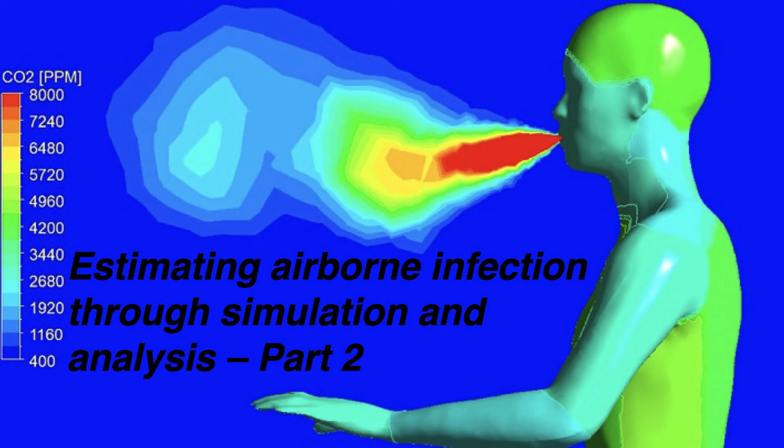As we all know, the built environment has been significantly influenced by the pandemic, and ventilation in buildings is one of the crucial measures for mitigating the spread of COVID-19 and hence a huge part of the international management strategy. So today we have a range of speakers who have been working in this important topic and have contributed to our understanding of how COVID has impacted our spaces, including influencing some of the recommendations and policies on mitigating its spread and making our buildings safer.

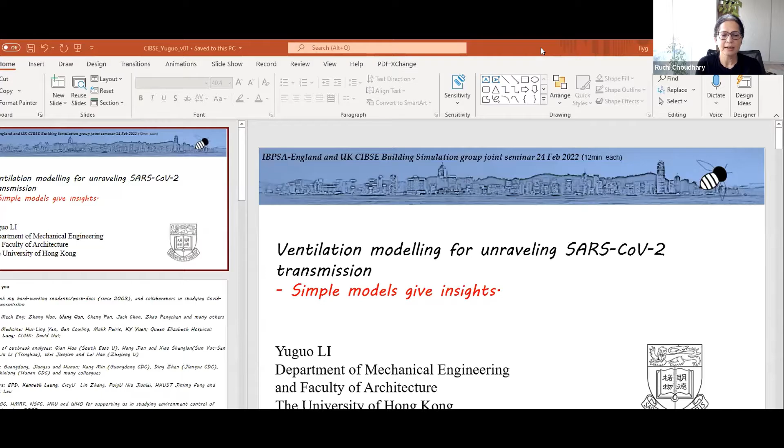So we have 4 speakers spanning industry and academia. Our first speaker today is Professor Yuguo Li, who is a chair professor of built environment at Hong Kong University. His research includes city climate, environmental studies of infection, and indoor environment. He also serves as editor-in-chief of Indoor Air, and he has collaborated with WHO, CDC, Hunan CDC, and Hong Kong EPD, and studied the transmission routes of SARS-CoV-2 in buildings.

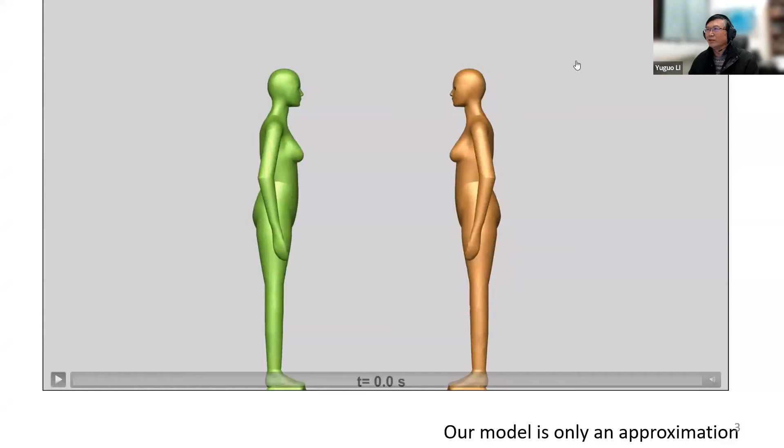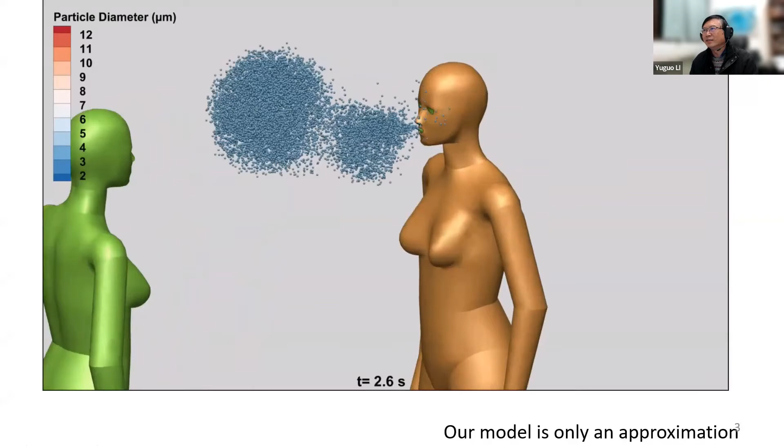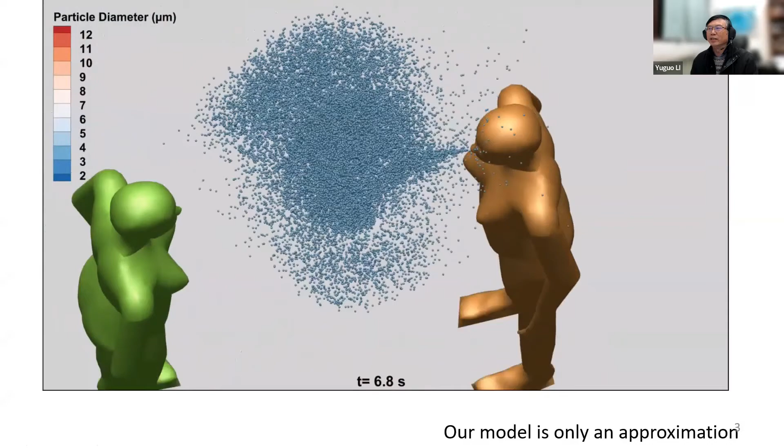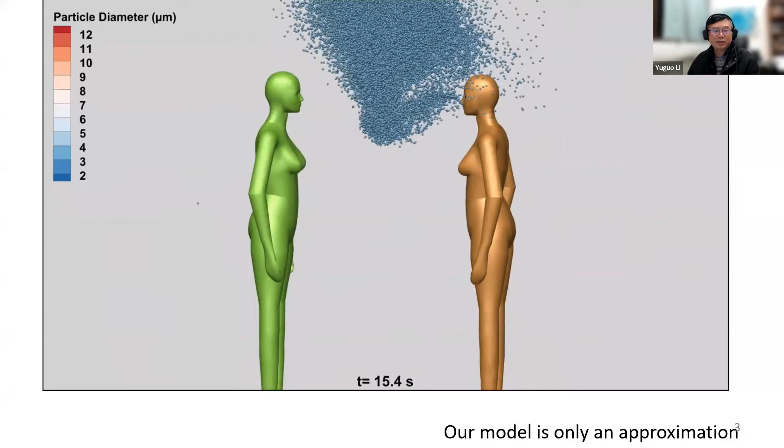Professor Malcolm Cook mentioned the colorful things, and I also like to start with the interaction between people when you move your head and produce droplets. Our assumption is the transmission is coming from the expired droplets, and although this kind of computational fluid dynamics can offer a lot of insights, simple models I find to be maybe most insightful. The model is an approximation, and this should be known to you all.

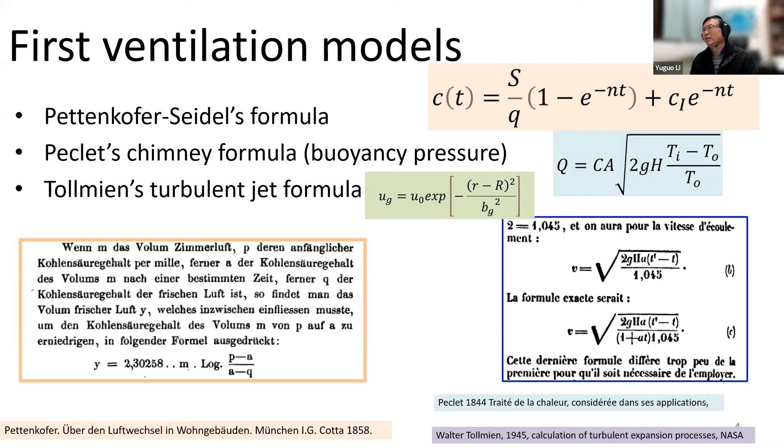There are 3 very basic models, and you might consider them the first ventilation models in the history of our understanding. The mixing box, with concentration as a function of ventilation rate and air change per hour, should be called the Pettenkofer-Seidel formula; in Germany and Japan it's called the Seidel formula. I learned the chimney effect came from Péclet; computational fluid dynamics people know this Péclet number. And the turbulent jet formula, probably the first one is Tollmien, Walter Tollmien, 1945. Those are the 3 formulas I will use today.

Maybe start with Hong Kong, because the situation there is challenging: we are crowded and the rooms are small for most families. So if you have exposure of half an hour, or 8 hours a day at work, which one is better? You stay in a large room with less ventilation, or in a small room with good ventilation?

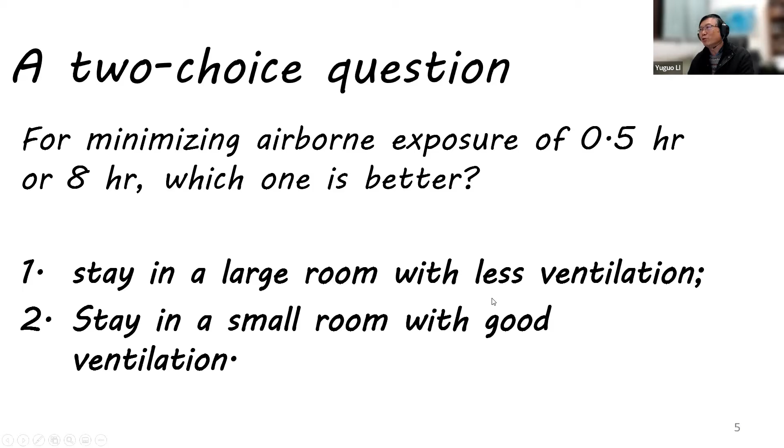In the past, we have been discussing whether we should use ventilation rate or air change per hour, until I had this simple model. You basically integrate the mixed room solution into the Wells-Riley equation for infection risk estimate. Then you take the integral for a duration of time, and the risk becomes something like this, and add a little extra part, which was already done by somebody in the 1990s. Let's call it the per unit ventilation rate correction factor. You can plot that factor for a wide range of ventilation rates, and the horizontal axis gives you volume per occupant.

Then you find a very strange thing: there is this black dashed line across the system for a wide range of volumes. If N and delta T are sufficiently small, but not very, very small, you do a quadratic approximation, then you find this one plus CT over QP equal to delta T over VP, the volume. Eventually you find this whole thing, infection risk or exposure, has nothing to do with ventilation rate or air change per hour. It actually is the volume.

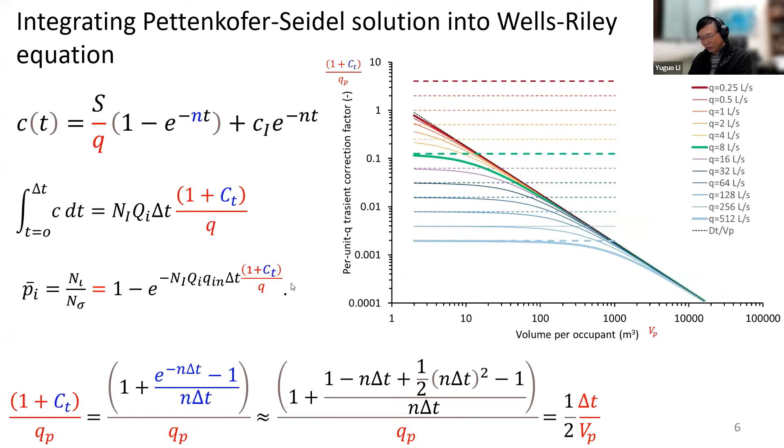So it's very interesting to use this very simple model to tell us quite a bit of physics. And the lower the better on this diagram. Of course, the smaller this red correction factor, the lower the risk. So this is the first thing you will learn.

And then for the JET model, before the pandemic, just in year 2019, we submitted this paper. A student looked into this jet, the particle deposition in the jet and inhalation. And she found out, mechanistically, the short range airborne can be 10 times, now using CFD, probably 2 or 3 times more important than the droplet transmission.

So this is very important, and such a little understanding shows how important the short range inhalation is, and that really helps to define short range airborne transmission as one of the major routes for the pandemic, for SARS-CoV-2, and probably for others too.

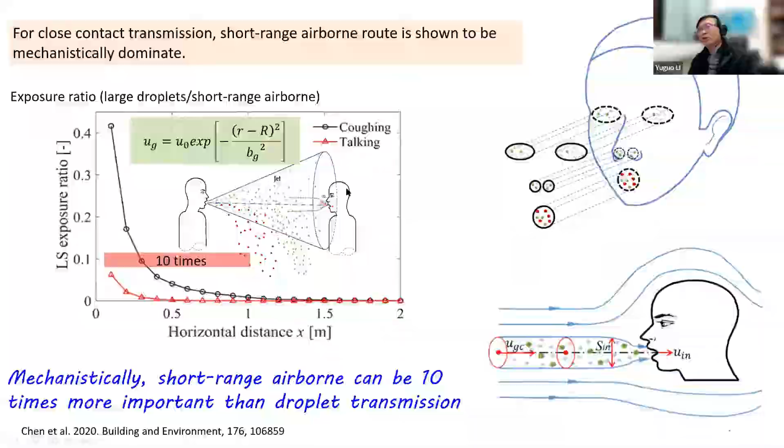And during the time, we learned that less outdoor infection is actually very important. I was asked in a seminar like this by a colleague at UC Davis, how do you explain that most infection occurs indoors, but less outdoors? Probably for Omicron, we can have outdoors. We can discuss if you like.

With some assumptions, you find if this is outside at a distance of 75 centimeters, then the concentration in the jet average is just 8.3% of that at the mouth. So in a room, if you give good ventilation, 10 liters per second per person, you get 8.8%. But if you have 1 liter per second, then the whole thing increases by 50%. Very significant. So it's the first time I quantified the ventilation impacts on short range transmission.

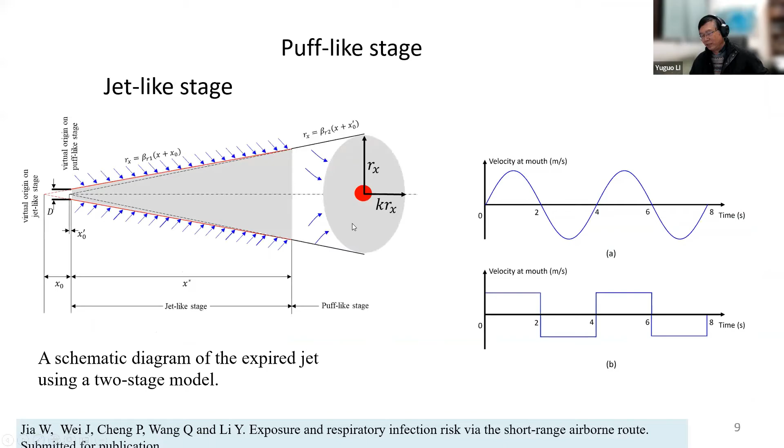Of course, the real expired jet is not steady, and then you may have a puff. And you can also develop a much better model. This model is now being reviewed, and dilution is very, very significant. This dashed line here is just following the linear, but actually it's non-linear as you move away with different activities, and dilution in the real calculation is much greater. We compared with some experimental data, and we find this dilution is much more meaningful.

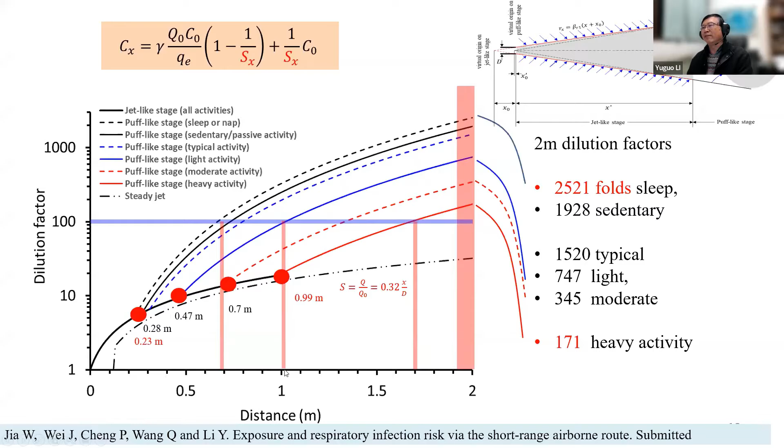If you have 100-fold dilution, that's very similar to 10 liters per second per person. When you exhale 0.1 liter per second per person, 10 divided by 0.1 equals 100. So after 100-fold dilution, distance is no longer relevant. And so that's why different countries have either 1 meter or 2 meter social distancing.

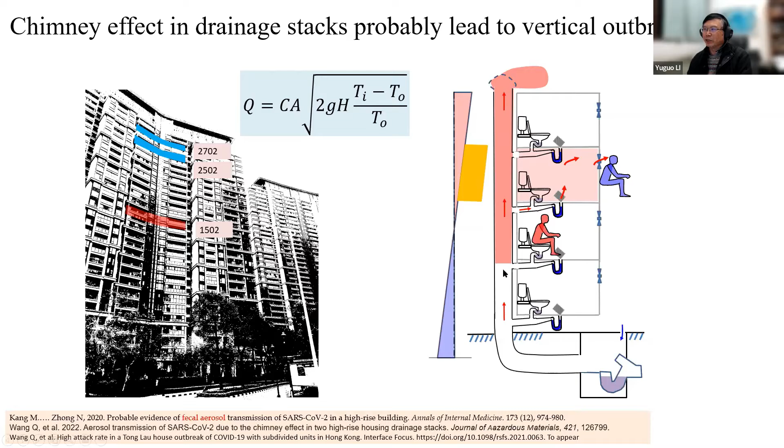And because of time, I will go through this quickly. The chimney effect: interestingly, we had many outbreaks with distant flats, and they were infected. We had probably around 15 before Omicron. Now with Omicron, there are too many every day to even be investigated. So this shows very strong evidence for airborne transmission. We have been measuring ventilation rate in the drainage stack in high-rise buildings, and we now highly suspect the chimney effect plays a role.

So anyway, 3 simple models actually allow us to develop a hypothesis that short-range airborne transmission and long-range play the major role, and the exact ratio between the 2 remains to be known, probably different for different situations. Anyway, they can explain almost all major phenomena we observed in the transmission. So I really go for simple models that reveal insights.

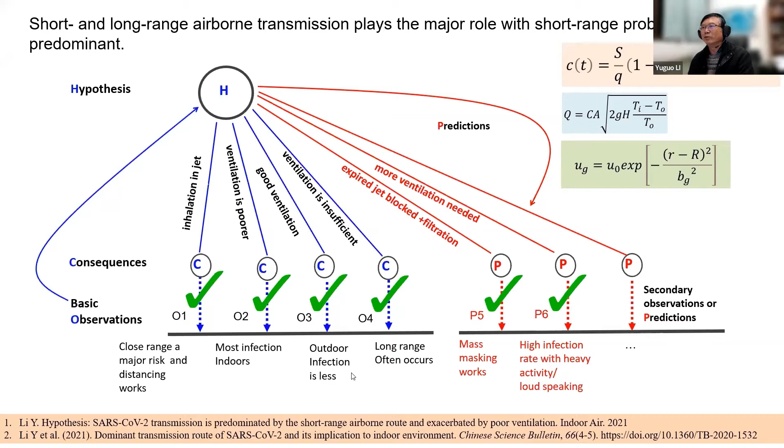So this will finish my quick talk. The simplest models, I believe, tell the real story, and poor ventilation worsens short-range inhalation risk. I believe future modeling will be more integrated with human behavior and virus kinetics.

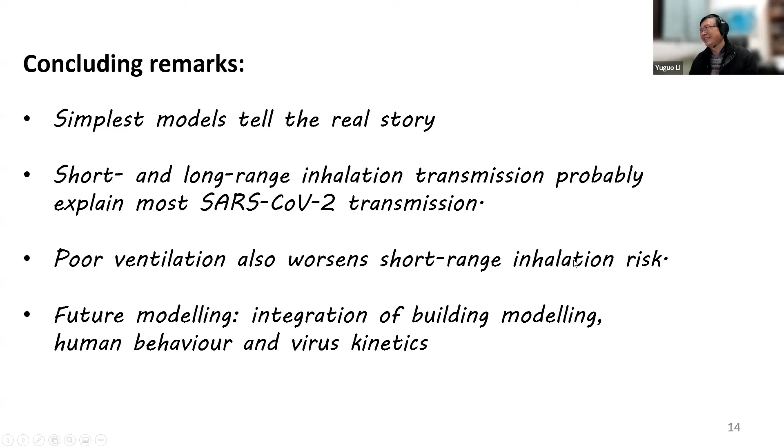Also, I suggest that we keep the questions to the end and move on to our next speaker, Professor Malcolm Cook, who is a Professor of Building Performance Analysis at Loughborough University and PI of IBPSA project AIRBODS, which many of you have heard about in the previous session as well. He, in addition to completing several of the UKRI and EU-funded projects, has also consulted for a wide range of applications worldwide, which included both the design and simulation work for healthcare buildings, schools, theatres, and libraries. So, Malcolm, over to you.

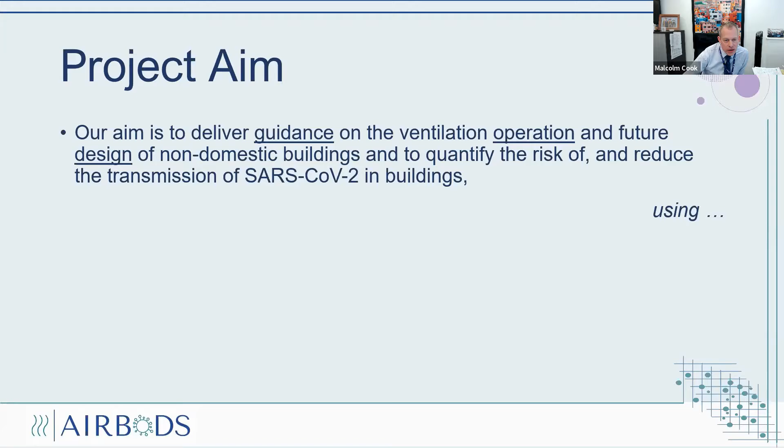And these are our methods. So we're really working across all of the three key research methods. We've got experimental work, computer simulation, and field work to give us the design guidance, which we're bringing together over the next 6 months or so. So I should say we're just over halfway through this project.

So first of all, experimental work then. So my colleagues at UCL are undertaking work in this Class 2 environmentally controlled chamber to provide experimental data on the transport and distribution of aerosols. So this gives us a greater understanding of the transport of exhaled aerosols, and provides us with a validation data set for our computer models. And you can see the specification of the chamber there.

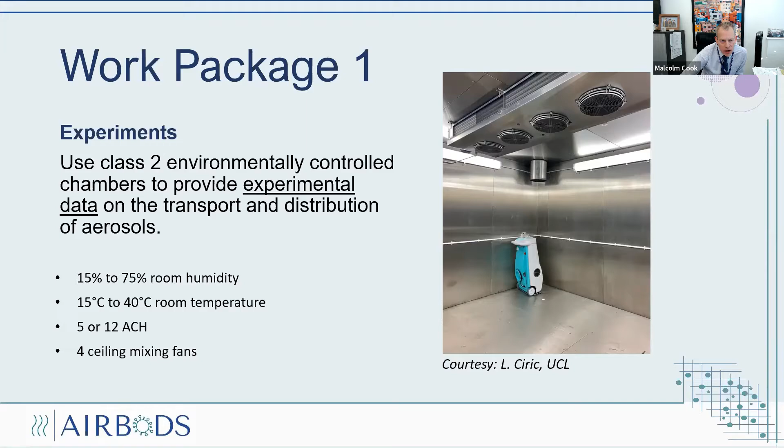So here are some of the examples of the tests that we've run to date. So we're looking at different types of aerosol generator. So PBS there, the phosphate buffered saline, as well as synthetic saliva, over a range of temperature, relative humidity, and ventilation conditions. The shaded boxes there simply indicate the cases that we've looked at so far.

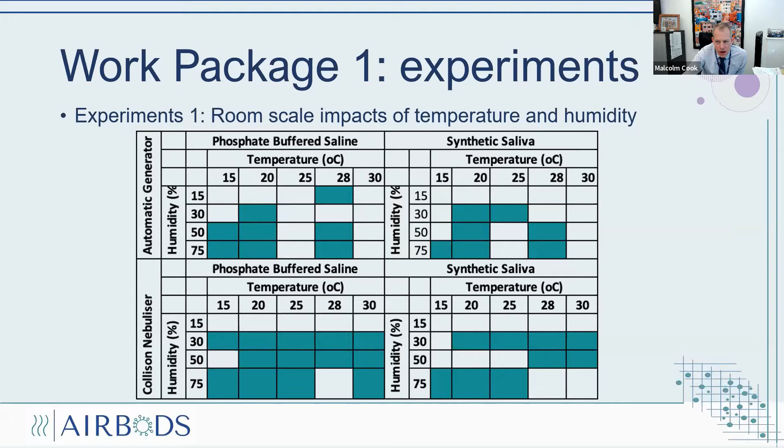And then here are some initial results. So time along the horizontal axis with the number of particles detected on the vertical axis. That's the number of particles at 0.5 meters away from the source, or at the chamber outlet here on the right hand side. So this shows the release of aerosols after 10 minutes, and then the variation in the particle count depending on the temperature and the relative humidity. So what we're seeing here is a clear correlation between the moisture content in the air, the relative humidity, and the particle counts.

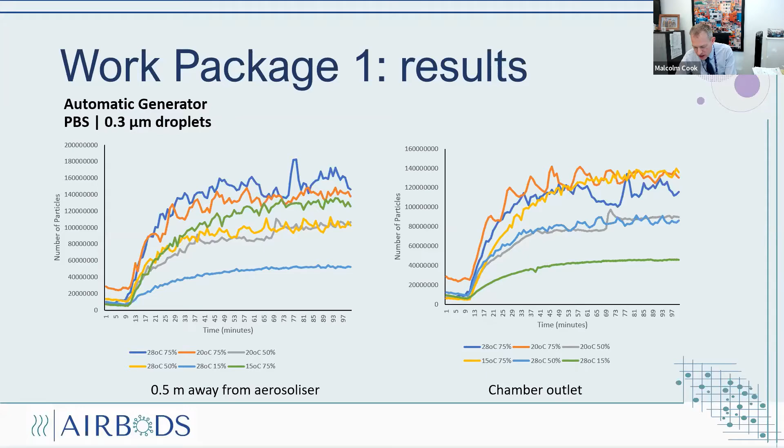So if I take the blue and orange line here, this shows the environmental chamber operating at 75% relative humidity and 28 and 20 degrees C, respectively. And we see that for those higher relative humidities, we're seeing a greater particle count, which is important in terms of understanding what the risks are in terms of transmission via airborne aerosols, depending on the relative humidity of the space. So out in Yuguo's environment in Hong Kong in the summer with high relative humidity, there may be much greater propensity for transmission relative to, say, out in the dry desert of Las Vegas. So that's work that's ongoing in the chamber.

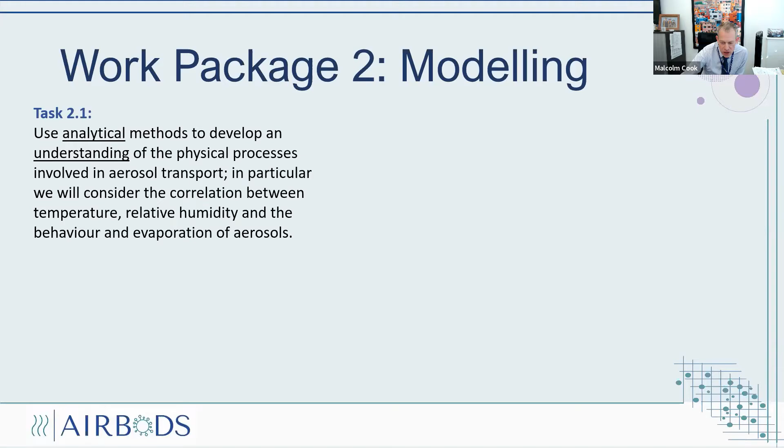Then I want to say a little bit about modelling. So we've got three areas of our modelling. First of all, we're developing analytical methods to develop our understanding of the physical processes. So we're looking at scalar analysis, we're looking at Lagrangian particle tracking, and we're inputting that into the detailed CFD model, which I'll talk about on the next few slides.

But then just echoing something that Yuguo mentioned, we've also got an analytical model where we've developed a relative exposure index model that enables us to determine how safe relative to a benchmark environment a certain space is.

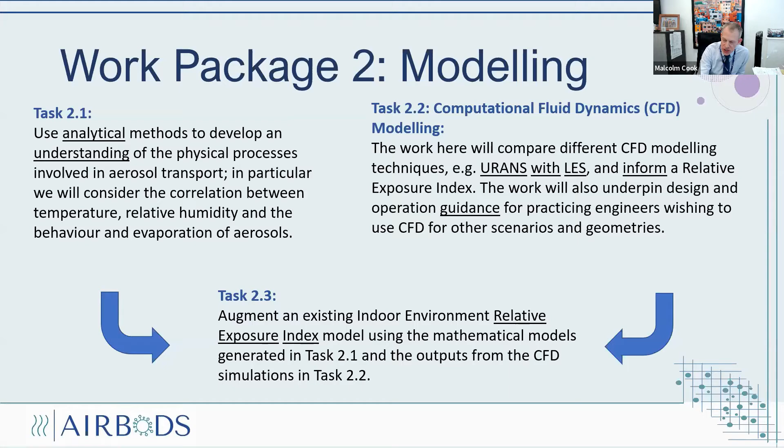And I'll show you some of those results as well in this presentation. So just staying with the CFD then for a while. So what we've got here is a coupled model of airflow and human thermal comfort. So this mannequin in this simulation is a thermoregulated breathing mannequin, so it loses heat to the environment or gains heat, whatever the temperature difference might be. These are transient simulations, buoyancy driven, obviously, and a very low ventilation rate.

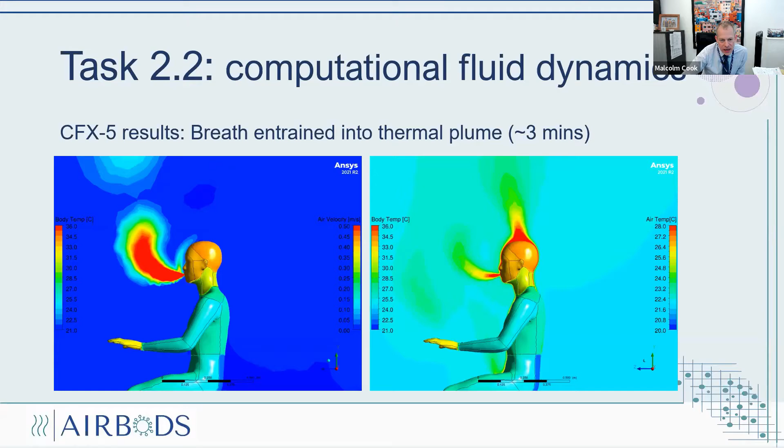So what we're looking at here is how CO2 builds up in the environment. And also what we'll be doing shortly is to add particles into this exhaled breath. So on the left hand side, we've got the airspeed field, and on the right hand side the temperature, so you're able to see the plume above the seated mannequin, and then the temperature of the exhaled breath. But really what we're interested in is this CO2 distribution. In the interest of time, I'll just go straight to the animation.

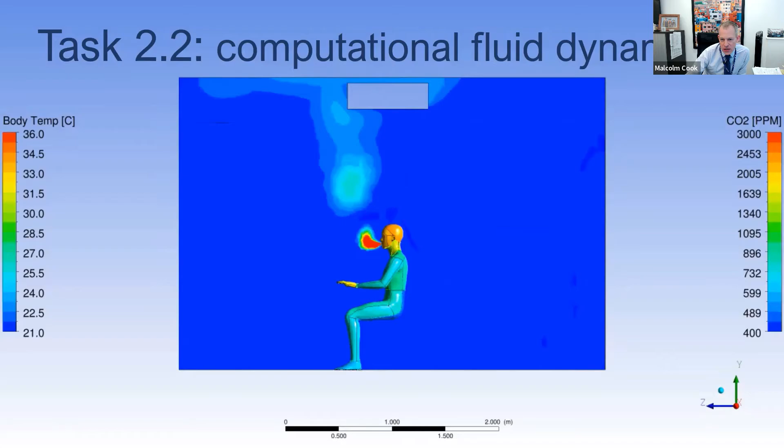So as I say, we've got a breathing thermoregulated mannequin. We're very keen on the accumulation of CO2. We're very keen on where that CO2 builds up, and are keen to look at the correlation between CO2 and particle tracks. So when we put the Lagrangian particle tracking into this model, that will enable us to gain an insight into the use of CO2 for assessing the transmission risk of viruses.

So then if I just move on to task 2.3, so this is the relative risk index model which I referred to, which has been developed by Ben Jones and Chris Iddon at Nottingham University, both of whom are with us this afternoon. So what they've been doing as part of the AIRBODS project is to develop a model based on a balance of the viral gains, the gains of genome copies due to emission from a person, the ventilation system, and the virus already present in the space, and how that might get diluted or removed from the environment. And there's a reference there which talks in much more detail about this model.

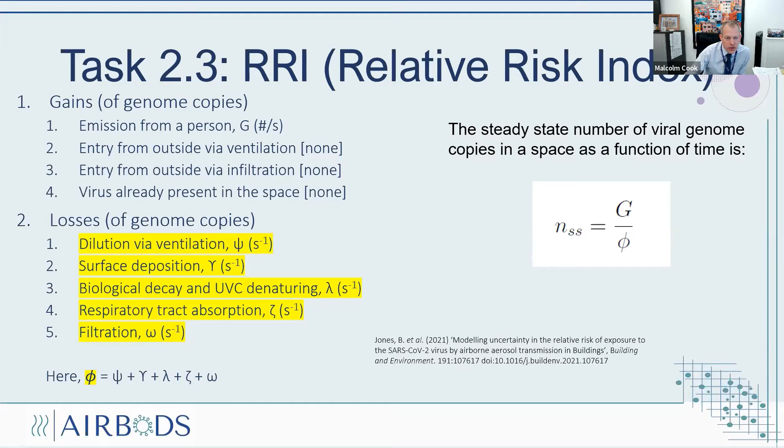But essentially the gains are measured in number of genome copies per second, and then the losses are arranged such that they can represent almost an air change rate. So if we divide the gains by the losses, then we get the number of genome copies, an indication of the viral load inside the space. Excuse me.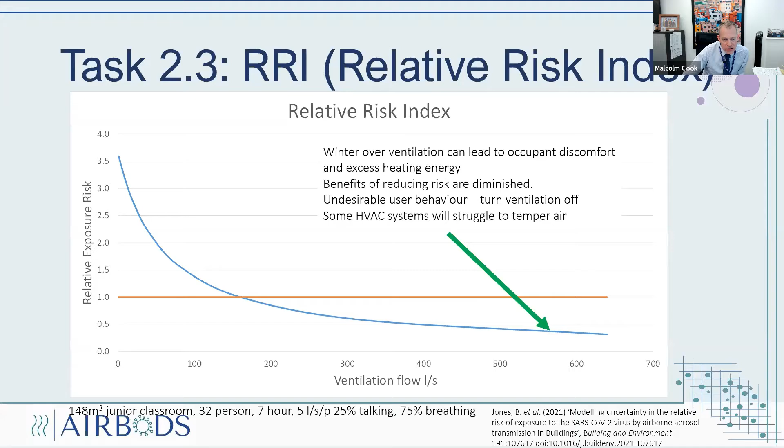And many of you will be familiar with the debate over, well, if I increase the ventilation, I'm going to increase the heating load. There are risks of occupant discomfort. But what this model enables us to do is to really start to quantify the benefits or the disbenefits of increasing ventilation flow rate. So as you can see, it's an exponential relationship. So even though we do reduce the risk of transmission, the rate of that improvement decreases in the manner you can see there, and at a rate that you can see there.

So of course, our attention as modelers and as people wanting to make a difference to the safety and the indoor environmental quality of our occupied spaces, our focus is in here. As you start to reduce the ventilation, or as people choose not to open the windows, how quickly does that relative exposure risk increase? And using this model, we can actually quantify the increase of that risk.

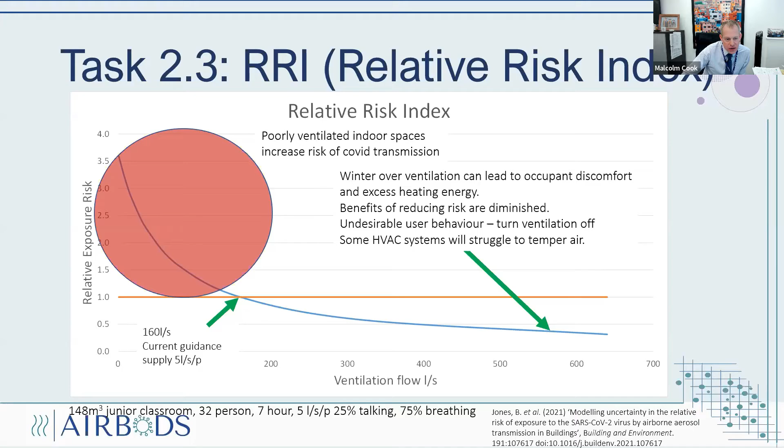Moving on to the field studies, so we were very fortunate. We were tied into the government's events research programme, working, as I said earlier on, with the DCMS and BEIS, involved with Wembley Stadium, involved with the famous nightclub event in Liverpool, plus some corporate conference events, as well as semi-outdoor festivals. So this picture on the bottom left here shows my colleague Ben Roberts at the Download Festival installing sensors, which is actually about 5 miles north of Loughborough, near to East Midlands Airport.

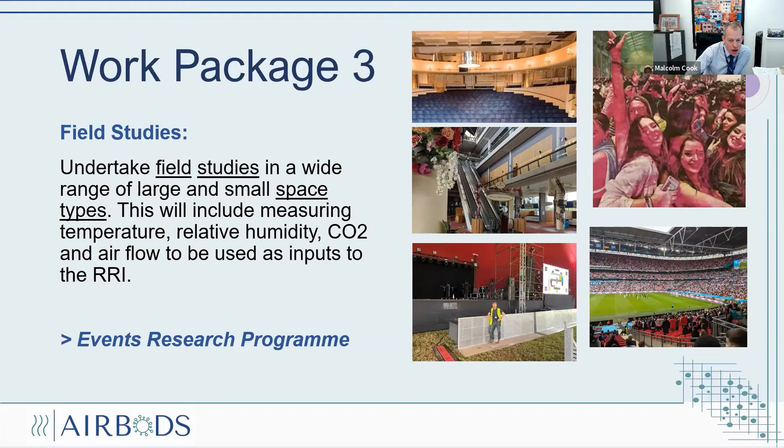So this work was led by Liora Malki-Epstein and a team at UCL. She coordinated this massive task of, and I won't remember the numbers, but hundreds of different spaces and tests across the country. So this was a mammoth undertaking for our team.

So this is about assuming that CO2 gives us a good indication of ventilation performance. Now we know that CO2 may not be directly equivalent to SARS-CoV-2, but we do know that CO2 is exhaled along with water vapor, and that these viruses live on water particles.

And part of what we do in AirBods will be to draw this comparison between CO2 dispersion and the dispersion of aerosols to really give some insight into the accuracy of using CO2 for assessing this transmission risk. But certainly we were able to use CO2 to give us an indication of the likely ventilation performance of the space.

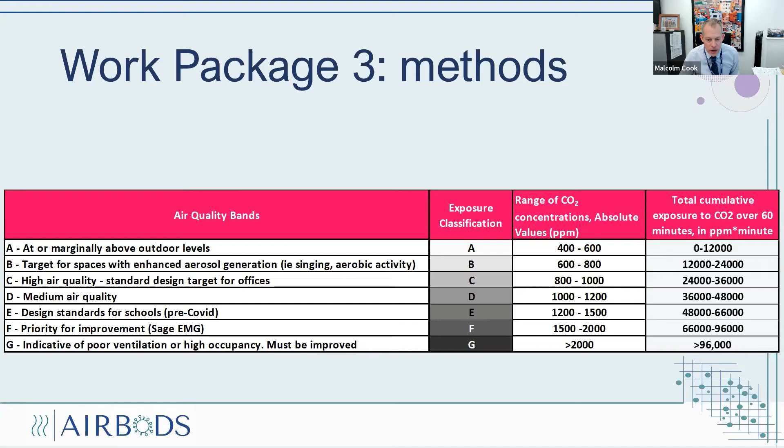And we did that by looking at instantaneous CO2 levels, shown here in the third column, and also multiplying the prevailing CO2 levels with the time that those concentrations existed to give us this total cumulative exposure to CO2, and using that came up with this exposure classification from A to G. And you can read much more about this in the documents, and I'll leave you with those references at the end. But just running through some images then.

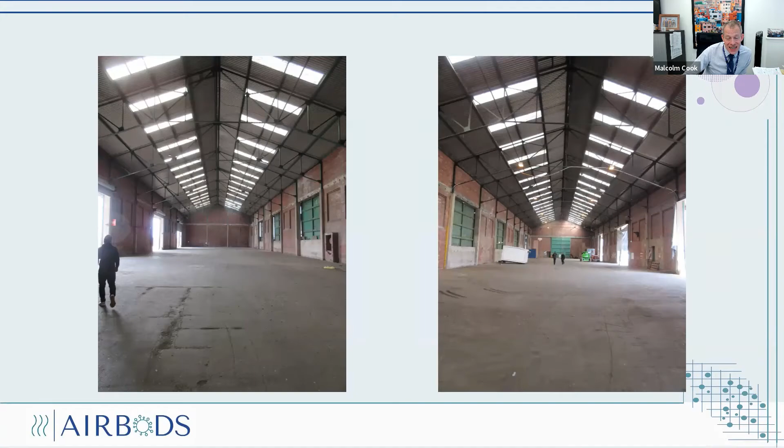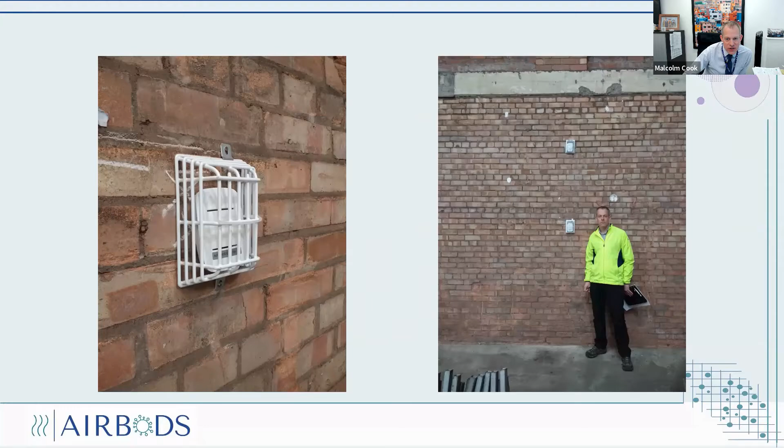So I mentioned the nightclub in Liverpool. This was a very, very large space, so 160 meters plus in length, and naturally ventilated, essentially from one side. This shows the sensors that we used. We were very nervous about this installation, thought that very few of them would come back, but I have to say my confidence in the people of Liverpool has been fantastic in terms of this. We got all of the sensors back. It was great.

So some of you may have seen that on the front page of the newspapers when we were undertaking this work. Just as a context, so here are our sensors along the edges of the space. With more time, we could have done a more detailed risk assessment, and we could have had cherry pickers in there. But what you've got to remember is that Liora and the team were setting this up in a matter of hours and days to make this happen. So we did what we could and did a good job, of course.

Yeah, have I got to finish now? Yeah, okay, thank you.

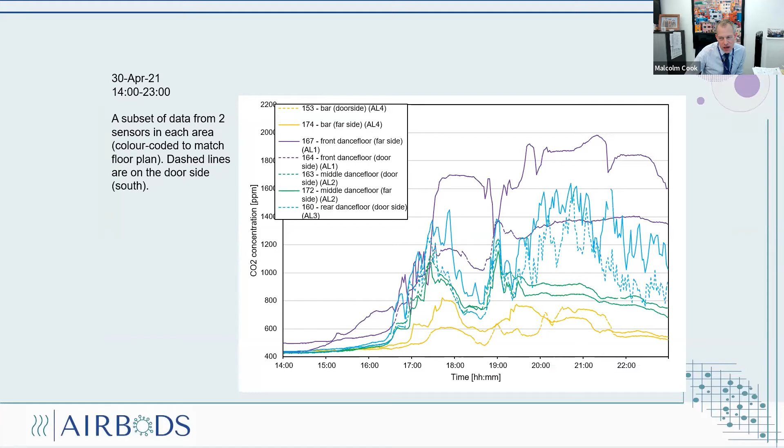So in terms of the CO2 levels, it won't be surprising for you to hear that the CO2 levels were higher on this side of the space than they were on the side where the openings were. So the single-sided ventilation meant that we were having a problem with crowding over on this side in terms of the CO2 levels, and they're shown in the graphic here. So I'm going to have to finish up here.

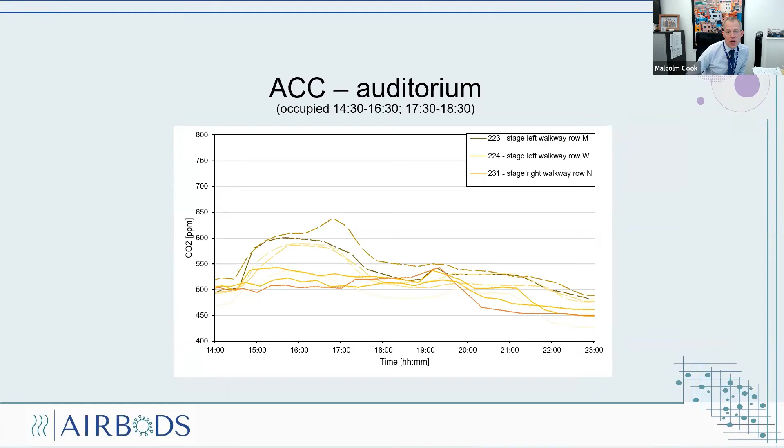This was a much more formal environment, lower occupancy, and unsurprisingly, CO2 levels much lower, and a space where we understood the ventilation much better. And that's what we found. So it was surprising the number of building owners we were working with who didn't understand how their buildings were intended to be ventilated. Understanding the plant, understanding when it was last renewed, commissioned, etc., is one of the incidental outcomes of the project.

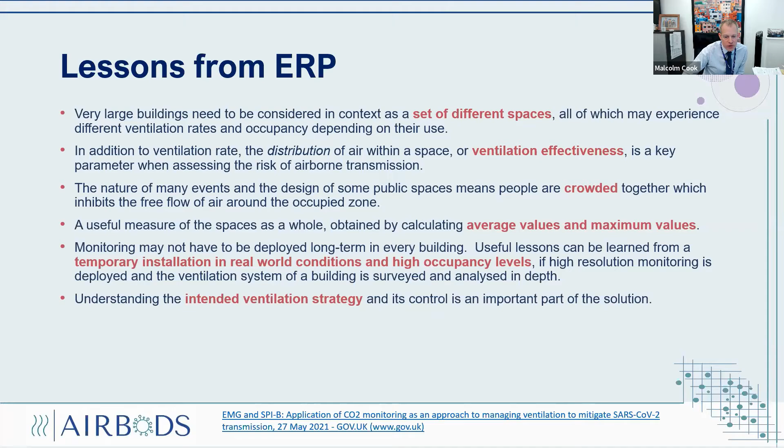So I'll just finish here. What we're doing now is to gather all of this information together, do a bit more CFD modeling, and develop our design guidance and dissemination. Do please visit the AirBods webpage, where we've got a list of publications showing a lot of the data that I've just been presenting to you.

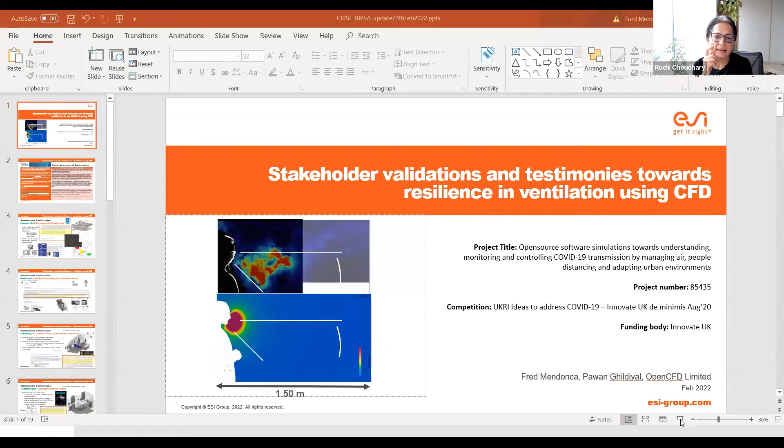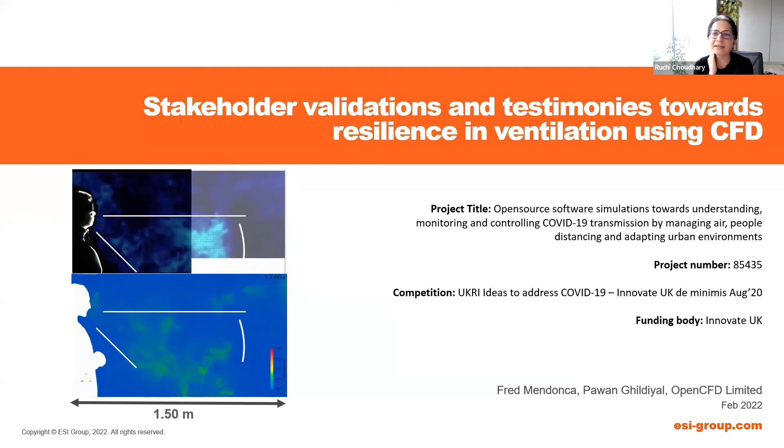And thanks a lot, Ruchi. Can you just give me a sign that you can hear me and see my screen? Yes, we can hear you and we can see your screen. We don't see you, but yeah.

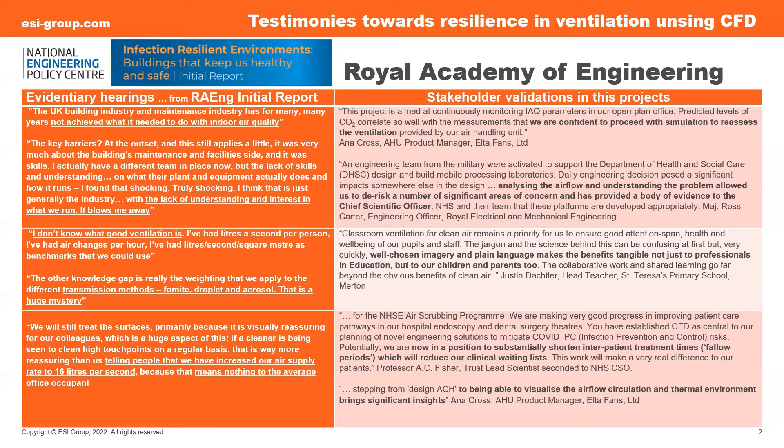Another testimony is coming from the healthcare sector, who are now feeling that they're in a position substantially to shorten their inter-patient treatment times, so-called fallow times, which reduces clinical waiting lists. Being able to visualize airflow, circulation, and thermal environments brings significant insights. So we feel as engineers a little bit like the cavalry coming over the hill, the knights in shining armor, showing how to use engineering really practically for the everyday environments that we find ourselves in. So I'd like to give you some examples here of some of the stakeholder studies.

The first one is really to do with validation. So we're sitting in a fully occupied and equipped office environment. The office here is actually the head office of Elta UK fans. Its occupancy is about 25 people dotted around the main office that you can see on the top right there, and the schematic on the bottom right. And essentially what we're doing is taking full detail of geometries, equipment, computer equipment, heat sources, heat losses to the exterior, ventilation, etc., including breathing cycles, breathing with or without a mask, talking loudly, all sorts of variants there, and trying to compare those with real validations in terms of humidity, CO2 and temperature measurements.

So on the right-hand side here, if you can see my cursor, is an actual set of measurements of the CO2 level during the day. On this particular day, which was the middle of July last year, during the morning, obviously the CO2 levels have recovered down to very low levels, or background ambient. And then as people start to enter the office, it climbs up to around 600 ppm. There's a slight dip at lunchtime and then it recovers back up to the same steady level, and then goes back down to background levels once the people have left the office. So you can see from these measurements, we can approximate a steady state in the office at around 600 ppm here.

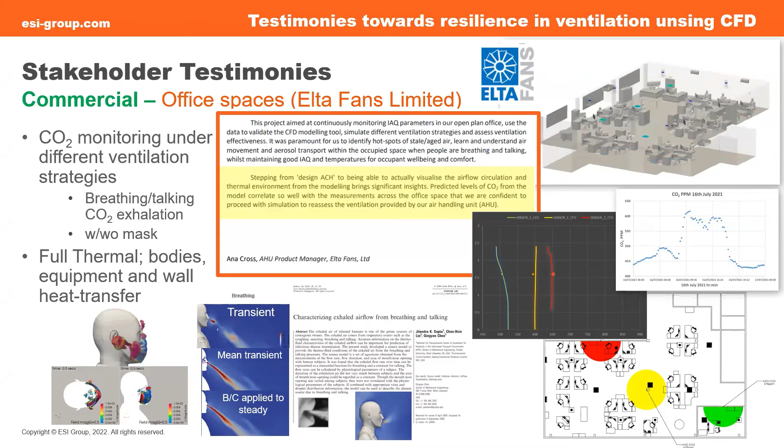Okay, I'll go on to my next example, which was activated very early in the COVID epidemic. So the Department of Health, supported by the military in the UK, were asked to fit out what's called mobile processing units. These are the backs of vans or trailer units, which were then equipped with very important pieces of equipment, microbiological lab units and LAMP processing units. So these are rapid testing and rapid results processing of the samples for COVID testing that were taken all over the country. So around 30 or so mobile processing units were commissioned.

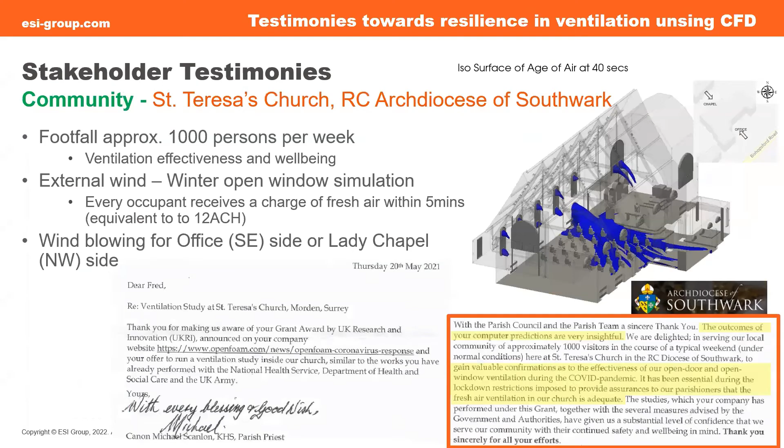Let me move on to experience or deployment in real world circumstances. So this is an example of a church gathering hall. Essentially, it comes from the London Archdiocese of Southwark, which has a footfall of around 1,000 people every weekend. The advice from the government, the advice from the Archdiocese, was open your windows and doors. That's the way you mitigate against COVID transmission. So they were concerned: just opening windows and doors, how did this practically affect or reduce transmission potential?

So these simulations were able to show that when opening the doors and the windows, especially in this winter condition that you see here from the animation, cold air pours into the space from the windows and the doors, and then spills in and fills up and covers, in terms of fresh air penetration, especially the area occupied by the people in this particular space. So if you watch the ISO contours, it covers the people within 5 minutes, 300 seconds. So this is demonstrating that the occupancy is getting a single fresh air charge every 5 minutes. That's equivalent to about 12 air changes per hour.

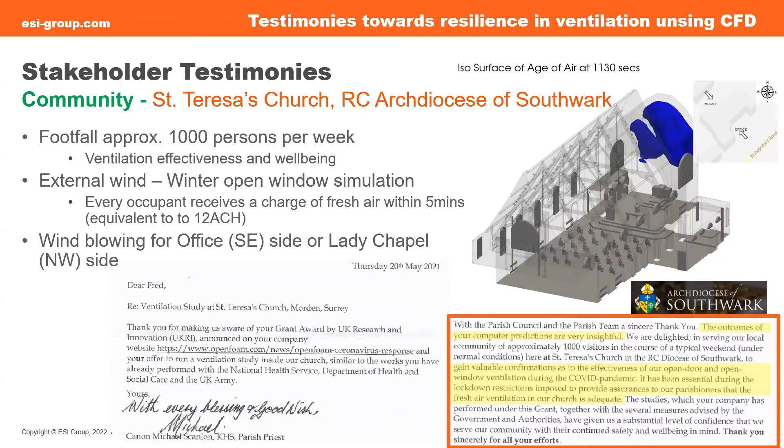Okay, moving on to healthcare and treatment rooms.

This is now a detail of looking into... 2 minutes, Fred.

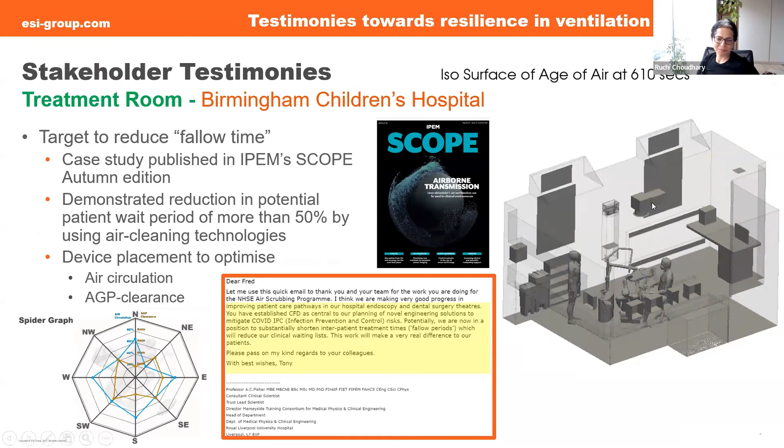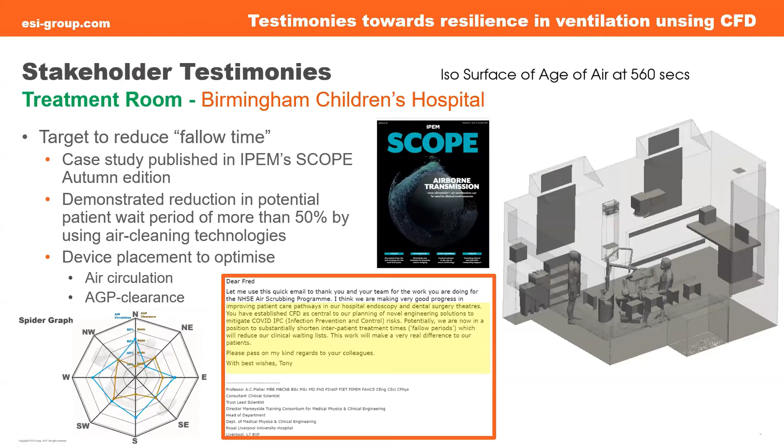Okay, that's great, thanks. It's looking at a detail of ventilation in a hospital treatment room, enhanced by mechanical ventilation. So in this particular case, only 5 air changes were coming from mechanical ventilation, and it had to be enhanced by certain devices. And the enhancing by certain devices also gives you some idea of droplet clearance. So when an AGP, a so-called aerosol generating procedure, generates droplets, we're able to track where these droplets are going to go in space and how quickly they will reduce to a small percentage of the initial number of droplets.

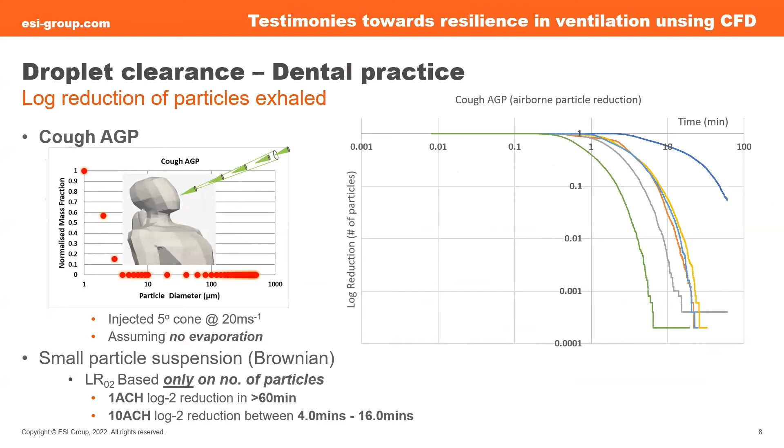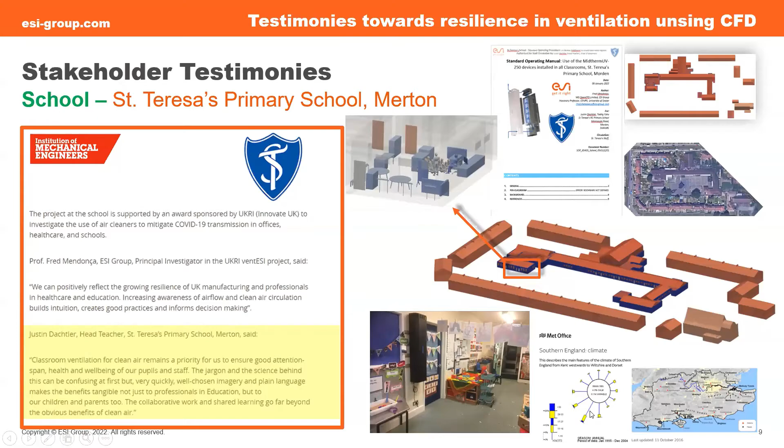So my final example here is an education center. It's a primary school in Merton in southeast England. It's quite close to a Met mast, which was measuring the average wind speed at about 8 knots in a southwesterly direction. So under these circumstances, what we're able to do is offer simulations of the external wind conditions from Met Office data with windows opened, and then compare those with a still day, with the air cleaning device on, with windows open and closed.

What we're now learning to do is to apply CFD to ventilation, to be able to measure, mitigate, and optimize ventilation within enclosures. And there are very many tools now out there to be able, in this validated space, to help those building engineers, those building managers, effectively to change or to adapt their ventilation to give the strongest resilience. The conversation is moving away from COVID, and it is moving towards air quality, ventilation, and infection resilience.

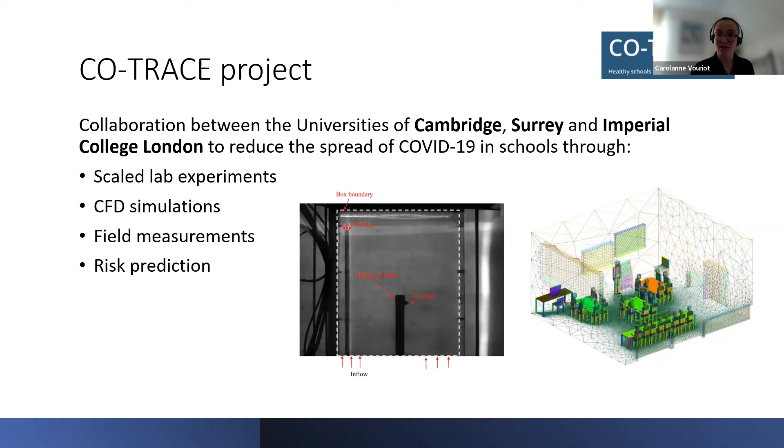And they've done both summer and winter campaigns, as well as more detailed measurements using several sensors in the same classroom. And the last work package I'll mention as well is one focused on risk prediction and how to infer risk in classrooms. We've also tried to work on how to make this work accessible to a wider audience, and specifically to teachers and school leaders.

So what we've tried to do through our CoSchools website is to develop tools to help with the DFE's CO2 monitor rollout in schools. So you might have probably heard that these monitors have been distributed in all schools around England to help with ventilation during the pandemic. And what we try to do with those videos is really to help and empower teachers so that they know why those monitors are useful,

but also how to best use them and how it might help both in the context of the pandemic, but also more widely to help with indoor air quality and the focus and learning of their students. So the videos are available online on this website, along with some additional material to really help with teaching, helping teachers know what to do.

I was going to start to talk about the first kind of work I did as part of this project, which was to look at how to infer risk from airborne transmission of COVID in classrooms using CO2 measurements. So I think this was presented in the first part of this event last year, so I won't go into too much detail.

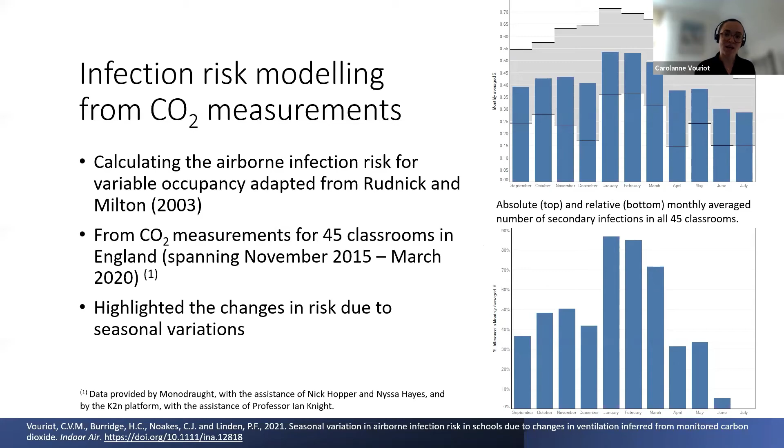So what we wanted to do next was to use CFD to check how valid this single point measurement was and how good CO2 would be as a proxy for far field exposure to infected breath. So what we decided to do was to really focus on the effect of ventilation on the distribution of CO2 and infected breath. And we wanted to look at a case where it might be hard to have a well-mixed room. So we decided to focus on a buoyancy-driven ventilated room through high and low level openings, so displacement ventilation.

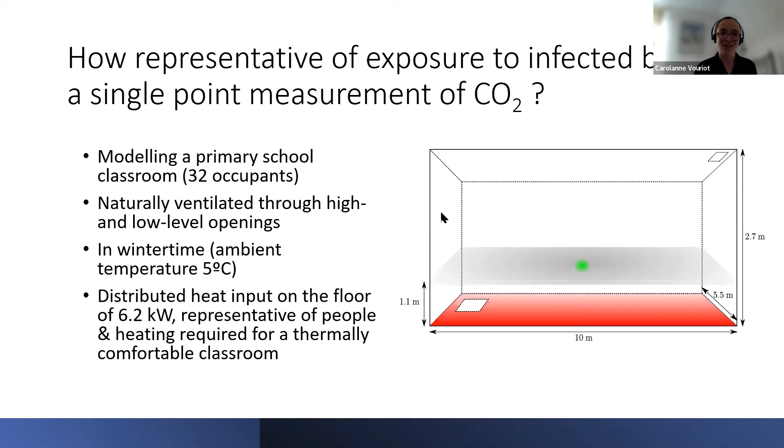And this is the simplified setup we ended up on, where occupants are represented purely through the heat they generate, and that heat is inputted on the floor along with the heat needed to heat up the room with radiators. And this was done using OpenFOAM simulations. As I said, the flow here is solely buoyancy driven, so we're not imposing any kind of flow rate at the openings. And the way we're inputting CO2 and infected breath is through passive scalars, just at a breathing height.

So we designed this ventilation setup to provide a comfortable environment to occupants. And we also looked at 2 configurations, one where the openings are on each side of the room, so this cross flow case that you can see on the left, and one single-sided.

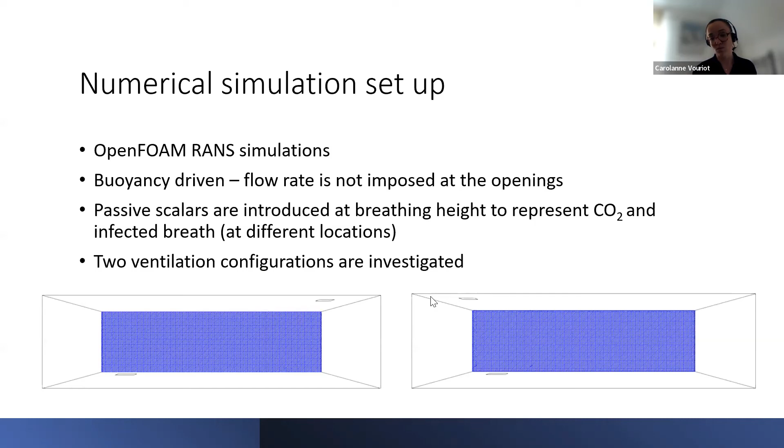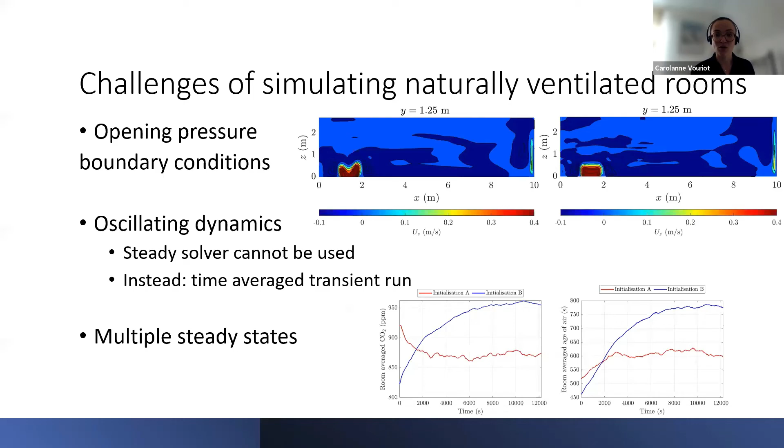What we realized quite quickly is that this is quite a challenging thing to do with CFD. Naturally ventilated rooms are quite hard to simulate for a number of reasons. One is that you have to use pressure boundary conditions at the openings. So if you make a wrong choice, it can directly impact your flow field and therefore your CO2 results. You also have very large scale fluctuations, which means that you have to use a transient solver. And then the initialization is very important because we found that you could have different steady states.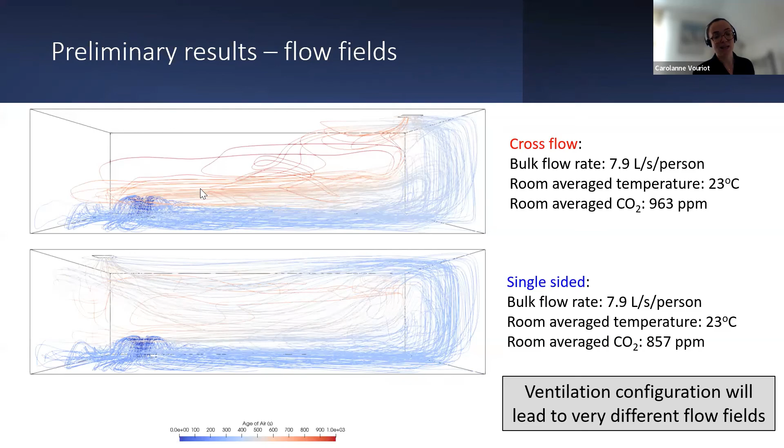So what you can see here is the streamlines entering through the inlets and then flowing across the room and back up. The colors show the age of the air, so the more red, the older the air is. And what happens in this case is that the single-sided setup is actually a lot better ventilated, and in the cross flow you have a big region where the air is quite stagnant.

And although this doesn't really affect the bulk flow rate or the room average temperature or the temperature profiles, as you can see here, it has a big impact on what happens to the CO2 distribution, both in terms of the room average CO2 and also the distribution across the height, as you can see here.

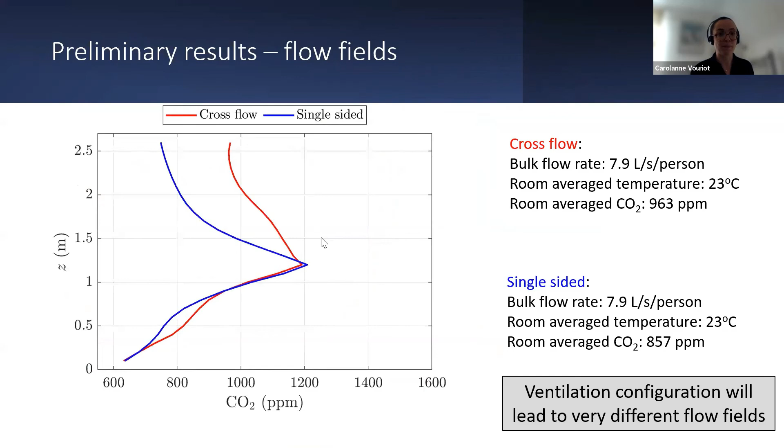And then to go back to this first study that I showed, looking at seasonal variation, we wanted to think about how valid CO2 was as a proxy for looking at far field exposure. And this we did by introducing different passive scalars at the same level at that breathing height and comparing them with CO2. So we introduced different ones to look at the effect of position.

And what this shows is that actually using CO2, your proxy exposure is within a factor 2 of the actual exposure. So it's not that bad in most of the breathing plane.

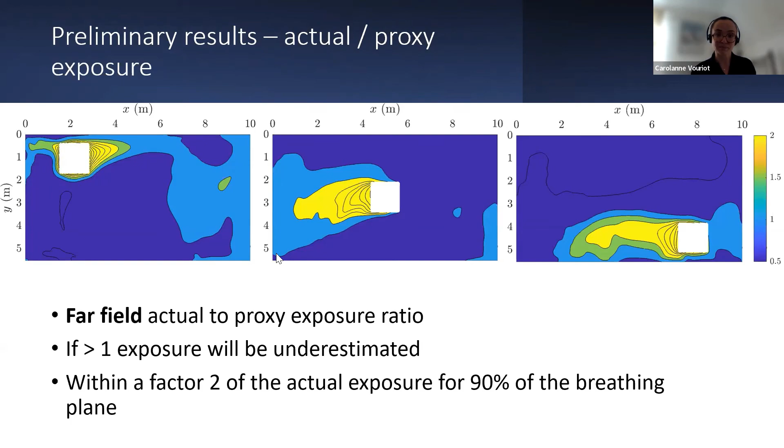So I just quickly wanted to finish this talk by saying that this work is going to continue as part of the SAMHE project, which starts in August. So this is a continuation from CoTrace.

And on top of that, we also plan to deploy more than 2,000 CO2 sensors in schools, and also kind of add a behavioral and citizen science aspect to the project, to develop a web hub, both to collect the data and also share it with the schools where we've been collecting the data, so that students can have a look at what happens in their own classrooms. So thank you.